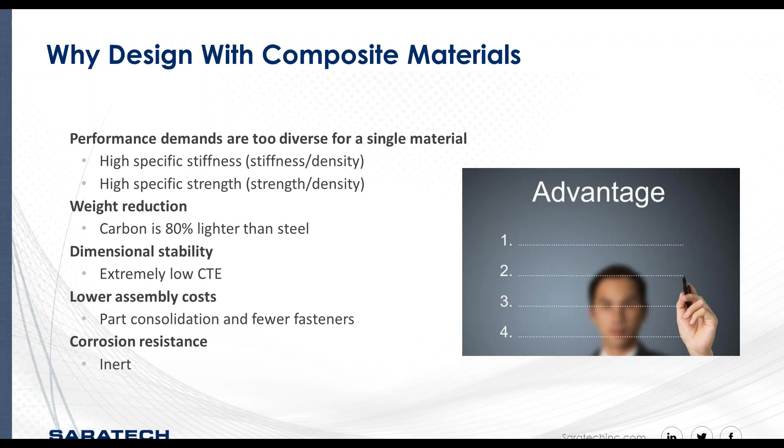The properties of carbon fiber composite structures depend on the selection of the components and how they are arranged. The two principal elements of carbon composite structures are the matrix and the fibers. The selection of the fiber, its orientation, and its layup order play a dominant role in determining the characteristics of the finished structure. The matrix serves to keep the fiber in the desired position, and it also imparts important properties to the composite structure.

The challenge is that, unlike working with metals, you're designing the material at the same time you're designing the part. In addition, there's a coupling of the part shape and the manufacturing process selections that are tightly coupled to the materials. This adds another level of complexity.

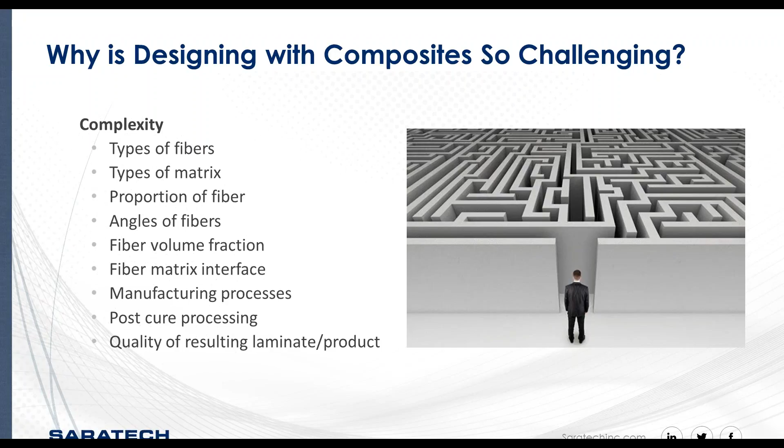Composite part design is a true concurrent engineering process requiring collaboration between different departments: design, analysis, and manufacturing. While it's possible to develop a composite part without the use of engineering technology that supports a concurrent engineering process, the results are typically less than perfect and do not achieve the weight savings, cost savings, production rates, and product quality that is desired.

In fact, the end result is a lack of experience. The use of a traditional design approach and the lack of vision of the complete picture leads to composite parts and products that are frequently over-designed. Engineering technology is key to addressing this and designing a product that capitalizes on the full benefit of composite materials.

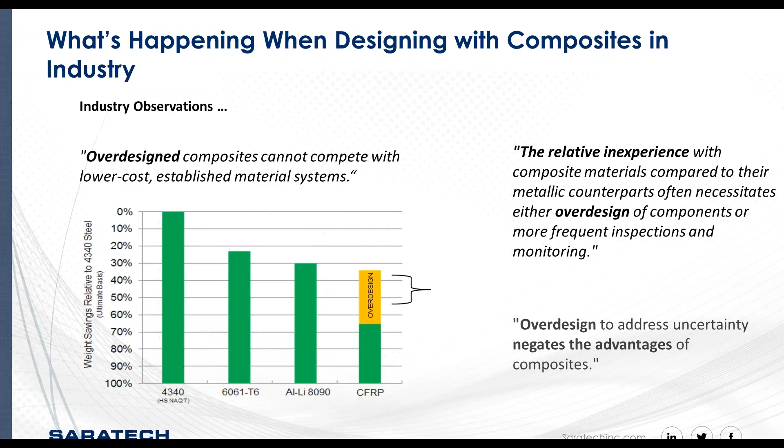Some industry statistics show that without the correct technologies in place to support an integrated and holistic development approach, results are often poor.

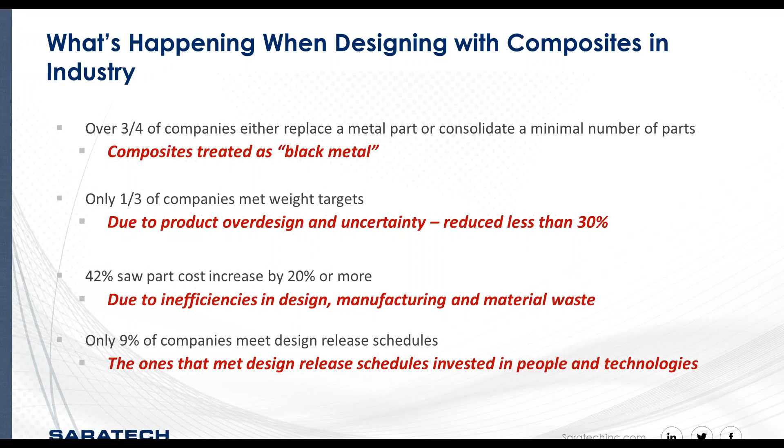Here are just a few of those statistics based on 140 respondents from different composite intensive industries. What you'll see is most companies either replace a metal part or consolidate just a small number of parts. Very few meet their weight targets due to over-design. Many saw the parts increase the cost, and without the right collaborative process and engineering technologies in place, it is very easy to slip schedules.

If you take everything from design cycle efficiency to reusing laminate data versus single-purpose laminate data, good throughput and product quality compared to slow and inconsistent manufacturing processes are normally the results when organizations invest in its people and the right technology.

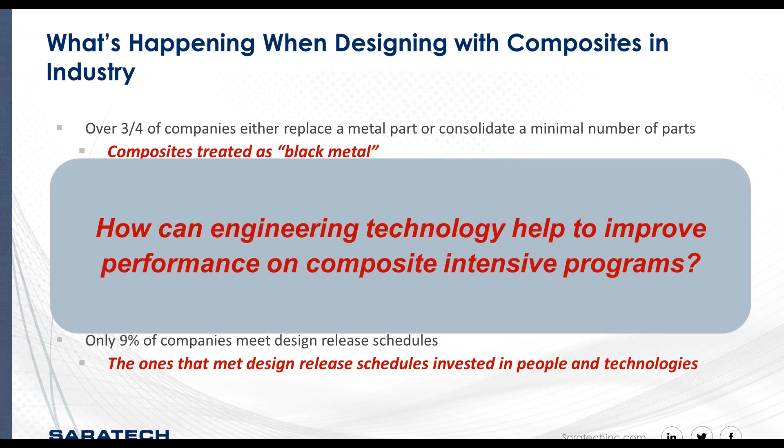So this is Michael again. I'm going to take you through some of the design considerations that go into composite designs and look at the life cycle of composite design, so that we can identify some of the challenges that exist currently without advanced engineering technologies, and then how advanced engineering technologies can address some of those challenges.

So the starting point of a composite design, whether it's done the traditional way or with the full benefits of engineering technologies, no matter what, the feasibility studies need to be performed in the allotted design space that's required, but there needs to be a geometric starting point for the analysis. So full feasibility studies, whether it's done with just the load conditions, which is the traditional method, is just generally with load conditions.

Advanced technologies can allow the ability for the use of looking at manufacturing processes, different geometries and different materials that can be the benefit of an integrated CAD and CAE environment.

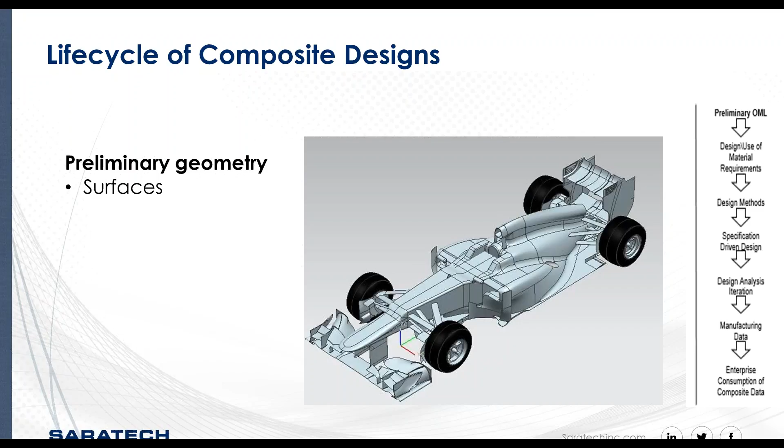So generally there's the starting point of the surface, or the part geometry. But once that concept has been selected after the feasibility studies, there are still many challenges that the process faces when there's that design exchange and communication between the designers and the analysts regarding the composite data.

And one of the main obstacles there is just generally the language in which these two disciplines speak. So, for example, a designer might speak in terms of outer mold line, but the analyst speaks in terms of mid-surface, which are used for meshing and so forth. So the designer and the analyst need to be able to exchange this information frequently.

But traditional methods of exchanging, interpreting, and converting this information can be extremely time-consuming and can also be very error-prone. So engineering technologies provide for the interoperability between the CAD and CAE applications so that they can share some of this composite design data, and they can perform many iterations in a shorter period of time. Also, because of that automated interoperability of the data, it's more efficient and there's less risk for error.

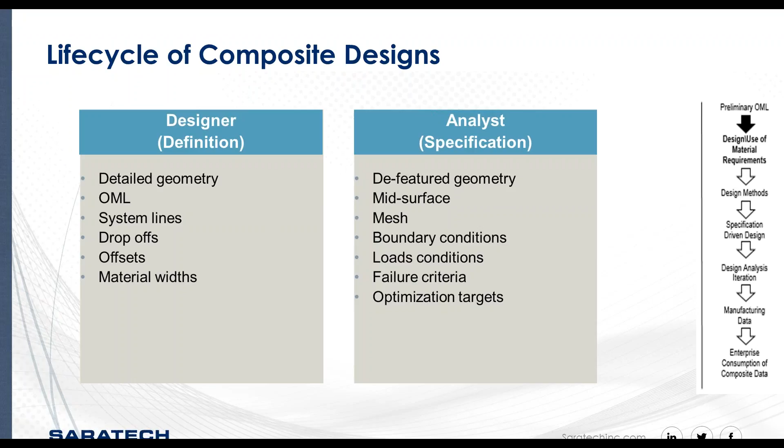So a traditional approach to composite design has been spreadsheets or solid layers of material in a CAD system. But both of these approaches don't take advantage of the downstream information like material behavior and the effects of manufacturing, and leave those decisions to be made much further down in the process, oftentimes at the production point, where if changes and decisions are being made there, it costs companies a lot more time and money. They affect the production rate and they affect the quality of the part, and they never really do take advantage of the benefits of composites.

So engineering technologies can allow you to design in your CAD system using design methodologies that are specific to your industry, but not only that, but allow you to examine and sample design methodologies with the geometries and the different variables so that you can explore what the best possible design method might be for your organization and your parts.

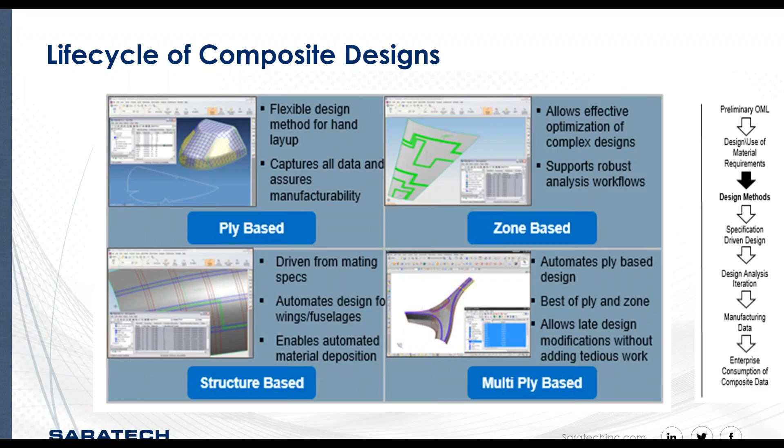So essentially a laminate is made up of a stack of plies. So although it might be feasible to manage simple composite parts in traditional manners, once those number of plies get up into the tens and hundreds, it becomes almost impossible to do that.

So engineering technologies can allow the design and communication of composite parts, incorporating specifications and requirements directly into the part to drive the development of the part.

So laminate family tables, otherwise known as laminate specifications, are predefined stack-ups that adhere to a particular set of rules, and then those laminate specifications are applied to particular regions of a part. So engineering technologies typically reuse and consume the specifications that are defined by the analyst and allow you to apply those to different regions of the part based on their analysis and their input into the specification.

So the opportunity there is that it eliminates the manual rebuilding of these family tables, which can introduce human error and cause a lot of rework downstream.

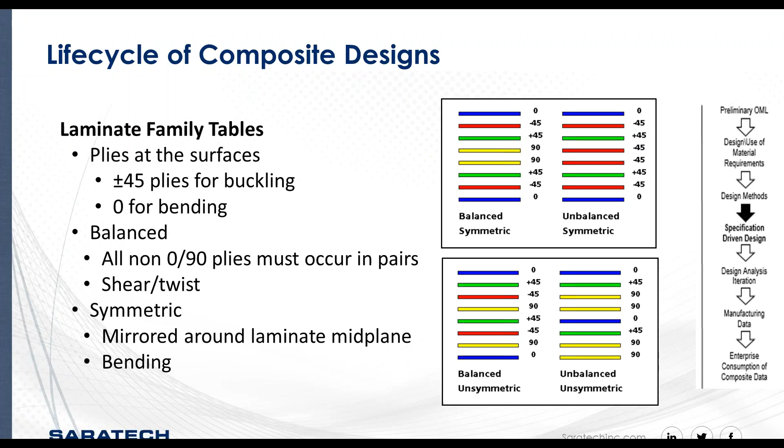Drop-offs are a particular part of the composite design process, used to accommodate different geometries that might be adjoined to the composite, or in areas where some relief is required. But what happens in these drop-off areas is that the amount of stress increases in the laminate at that location.

So there are two considerations that need to go into these particular drop-offs. One is certainly the number of plies being dropped off, but secondly is the stagger distance, or the rate at which the plies are dropped off.

It's really not feasible for a designer to carry out a detailed analysis of the entire structure, especially with these drop-offs existing throughout the structure, without engineering technologies that can capture and reuse this information as company specifications. This not only aids the designer in developing the part itself, but provides a meaningful way to communicate with the manufacturing floor downstream.

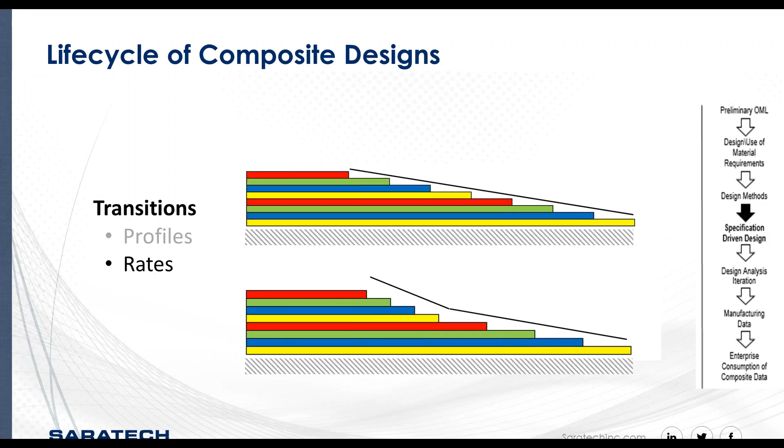Another design consideration is ply corner behavior. Here's an example: chamfering is sometimes used where drop-offs just don't make sense, specifically when automated fiber placement is being used.

Once again, this is an area where engineering technologies can be used to capture these considerations as standards and minimize the amount of effort that goes into design, as well as reduce the number of errors downstream.

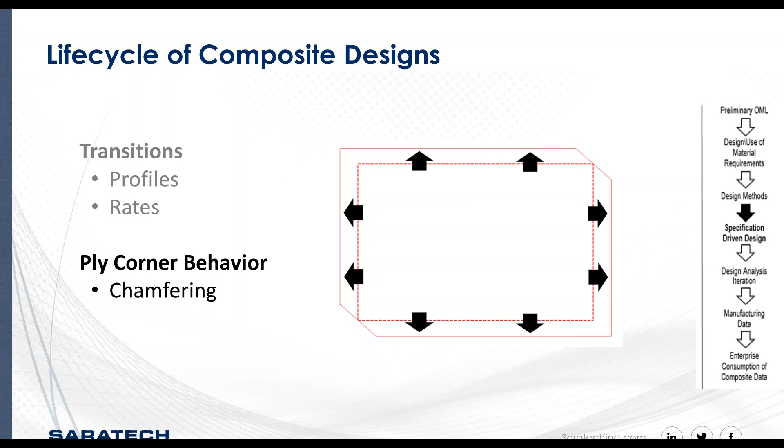Automated fiber placement can be fantastic for large panels, and can ensure faster and more consistent layup. However, design considerations must address certain challenges that are faced based on, for example, using automated deposition or automated layup.

There's the effect of minimum course length, which results from the machine laying out the material. It's where it's pinching and rolling on the material and the cutting head itself.

So whether chamfers are being used or flags, like this example in the lower right-hand side called a bird beak, these decisions really shouldn't be left up to manufacturing to make, because they can affect the overall design of the part. Using engineering technologies allows you to capture these considerations as specifications, and begin to develop a company standard based on the type of parts you're developing in-house.

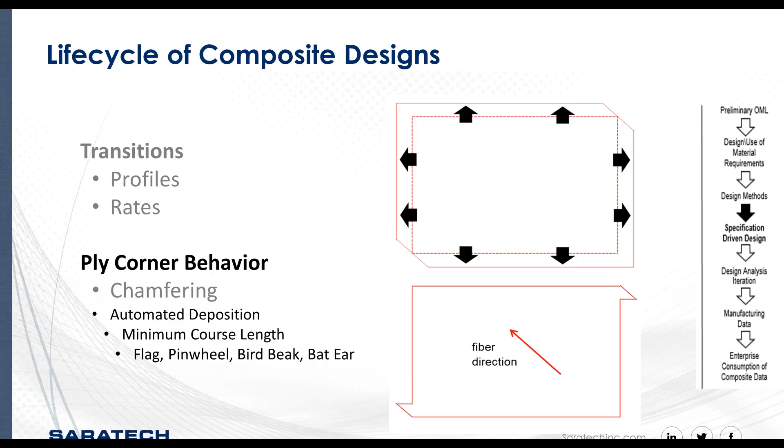Alternatively to automated fiber placement, manual layup of composites is still probably the most popular usage of composite material, used by most companies out there in industry.

With manual layup, splicing and darting are important design aspects, and if left up to manufacturing, three undesirable outcomes can occur. First, the splice or dart of a particular orientation of plies is repeated in the same location. Second, the splice or dart is applied inappropriately, in a critical area where a particular type of splice or dart should have been used.

Third, because these darts or splices aren't defined up front, there's a lot of trial and error within that process, and a lot of wasted material as a result.

Using engineering technologies can ensure communication of these repeat patterns, that critical regions are identified, and that there is appropriate use of splices and darts in those regions. Also, the splices and darts are used to develop ply templates that can produce a more repeatable and predictable manufacturing process.

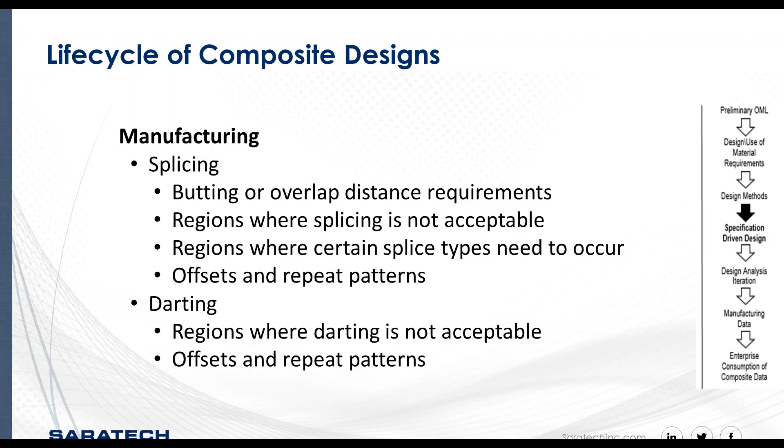Design and analysis iterations must be performed to eliminate the over-design of composite parts, which is very common. This is where a concurrent engineering process is used to couple the part shape, the material, and the manufacturing processes to achieve the best product solution.

The performance of composites is very dependent on the fiber orientations with respect to loading, and it's been shown that fiber misalignment has a significant impact on the modulus and strength of a composite part. For example, some studies have shown that misalignment of fibers by as little as 10 degrees between two ply specimens can cause a loss of strength of nearly 40%.

Analysis folks usually begin with idealized fiber orientations and don't really take into account the material type and form, or the effects of the manufacturing process or part shape during layup. Ignoring these factors means material knockdown is used and highly conservative safety factors are applied, which results in over-designed parts.

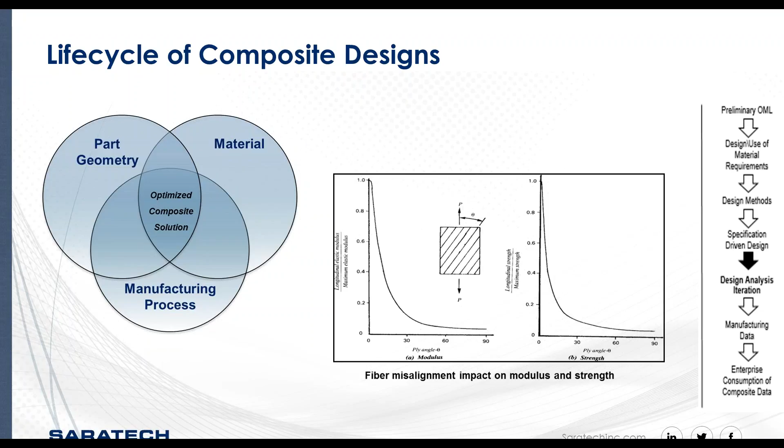So how do we eliminate some of these challenges of over-designing composite parts? Well, the inputs into the iterative process really need to be understood, and then the outputs from that process can result in better parts. One of the most important parts of the design process is the iteration that occurs between analysis and design, but in coordination with the physical test data that comes out of manufacturing.

However, companies like yourselves are being squeezed and pressured to have to do these virtual designs and builds, requiring engineering technologies that can exchange this critical data about the laminate being developed.

So in an effective iterative process, the analyst needs to be able to exchange the laminate specifications he's developed from the CAE application with the design engineer using CAD. And subsequently, the design engineer needs to be able to communicate the detailed laminate he's developed in CAD to production solutions that support things like nesting, laser-assisted layup, path planning, etc.

And the design engineer needs to be able to simulate and predict the fiber orientation based on the manufacturing process being used and exchange that back with the analyst for performance validation.

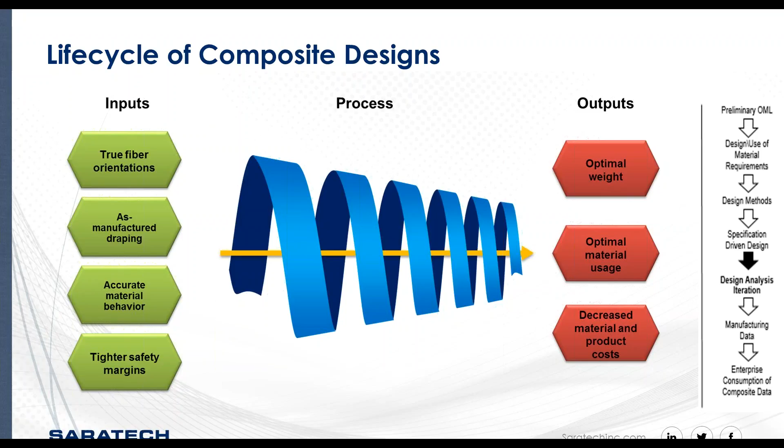So I've only touched on some of the design aspects and design considerations that go into composite part design. You can see, based on the number of inputs, that composite design can be much more complex than traditional metal part design and manufacturing.

And there are engineering technologies that exist to support this entire design process. There are analysis technologies such as NX-CAE, which includes linear and nonlinear analysis for composites, and then also specialized tool sets for laminate optimization that provide the basis for this whole development and iterative process.

And in combination with an open format that allows you to exchange this information, that's used by Siemens and other leading composite CAE solutions, this data ends up being reusable.

In CAD, the part of the upfront process, in combination with specialized engineering solutions for composites like FiberSim, it can support the initial geometry creation and then take some of these industry-specific driven design methods to minimize the manual geometry creation, and also be able to assist in all the changes that take place throughout this iterative process.

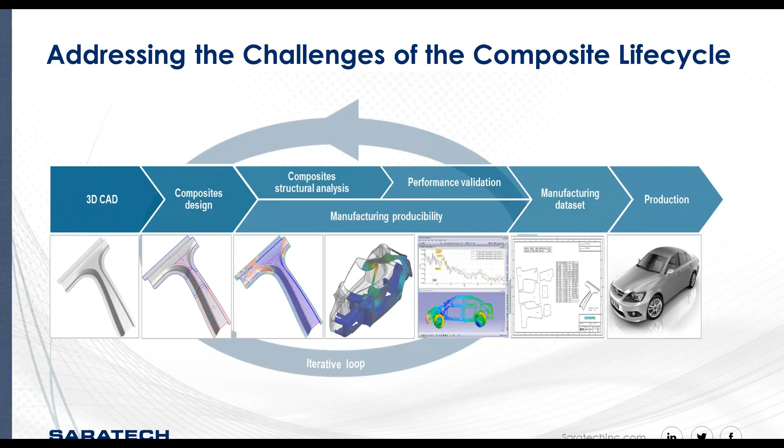And then FiberSim can also create the manufacturing output data sets so that they are in a repeatable format, a common language that the manufacturing floor understands and continues to see. This provides better predictive manufacturing producibility, as well as more consistent manufacturing downstream.

So what can we expect out of engineering technology? Well, first there is the digital authoring of the composite designs, reducing the complexity, but also looking at the variables that are really the benefits of the composite materials.

There's the ability to ensure that specifications and requirements are met, but actually driving the design from these specifications themselves versus trying to apply them in a CAD space without the use of these engineering technologies.

Then there is the accurate prediction of material behavior, and being able to look at different options for materials and manufacturing processes, and then defining the processes in conjunction with the manufacturing engineer.

So FiberSim has been able to do this for a while and address these issues for some time, but with FiberSim being a best-in-class engineering technology, it addresses some of the additional benefits of data management and the reuse of specifications, requirements, standards and processes into a single interface that includes CAD and in some cases CAE.

For example, with Siemens NX, FiberSim is built right into the same CAD and CAE environment that engineers and analysts have been using for years.

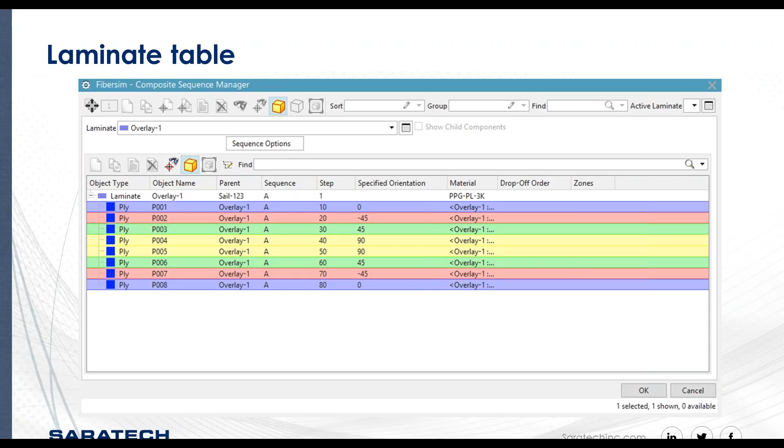So bringing you back to that slide where I showed the laminate family table and the laminate specification, the colors give you a more visual view of the laminate orientations based on color.

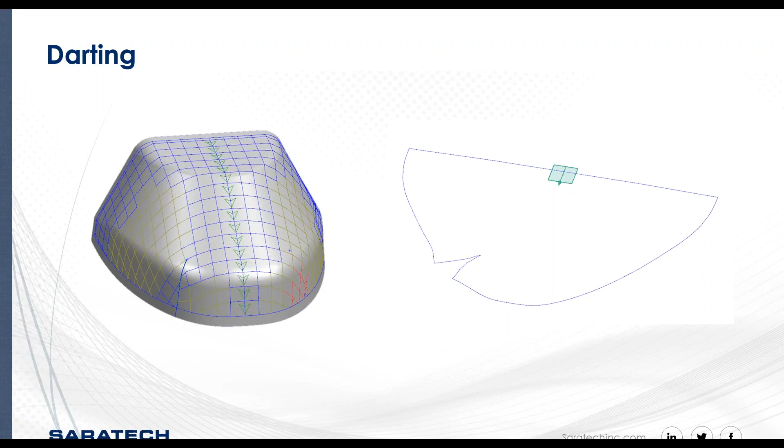Here's one example of a dart for this particular laminate ply layer. You can see the dart in the lower left-hand corner, which eliminated some wrinkling and buckling on this particular part at that region. And you can see the corresponding flat pattern that results from that automated analysis of the dart at that ply.

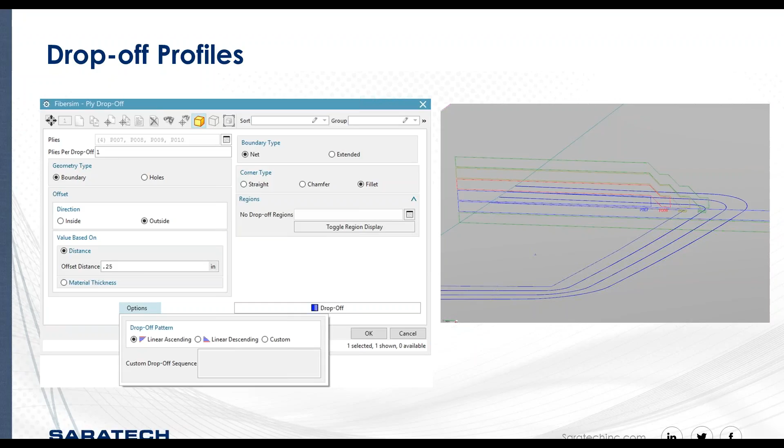To summarize, there are many benefits to composite materials, mainly the strength to weight ratio. The challenges of composites design, due to its multiple input variables, generally result in over-designed parts that don't meet the cost, schedule, and weight targets companies are trying to achieve. FiberSim is a multi-CAD composite design and simulation solution that can greatly reduce the mistakes made by organizations adopting or perfecting their composite part manufacturing initiatives, and helps address the challenges companies face with their composite design process.